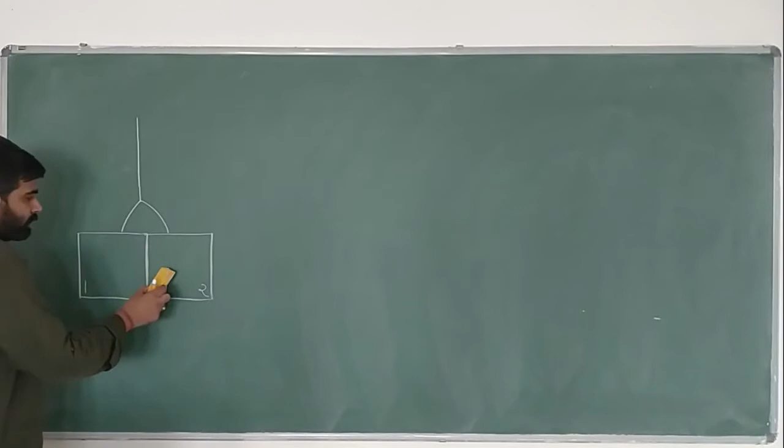Now in arc welding, the arc is going to act as a heat source, a source of thermal energy. So this base metal or workpiece to which we want to weld is going to absorb heat from the arc, and once the temperature crosses the melting point temperature, they will melt and form a weld pool like this.

Now, as we are using a consumable electrode, the electrode is also going to melt, and the droplet of molten metal from the electrode will also become part of the weld pool. Here you will see the droplets of molten metal coming from the electrode, and later on they will also become part of the weld pool. It is also called the molten metal pool.

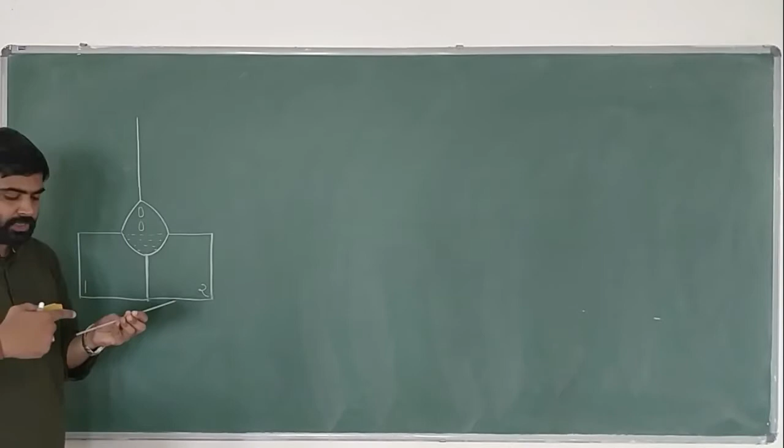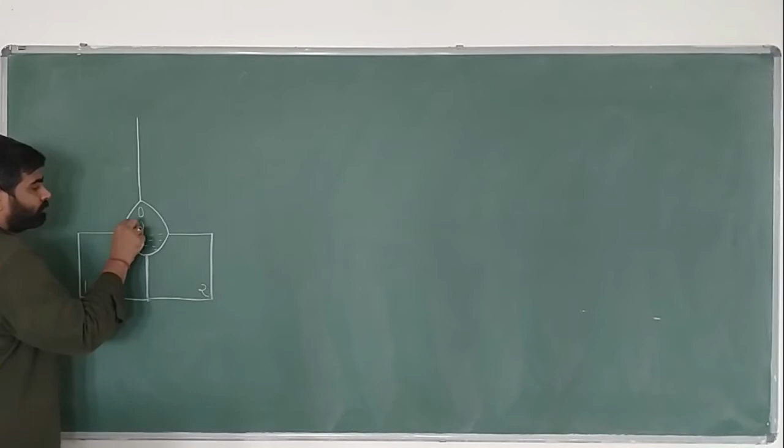Now when the electrode gets consumed, along with that, the flux coating is also going to disintegrate. When the flux coating disintegrates, it does two things. It is going to form a layer of slag over the weld pool, and second, it is going to produce a shielding gas atmosphere or shielding gas layer

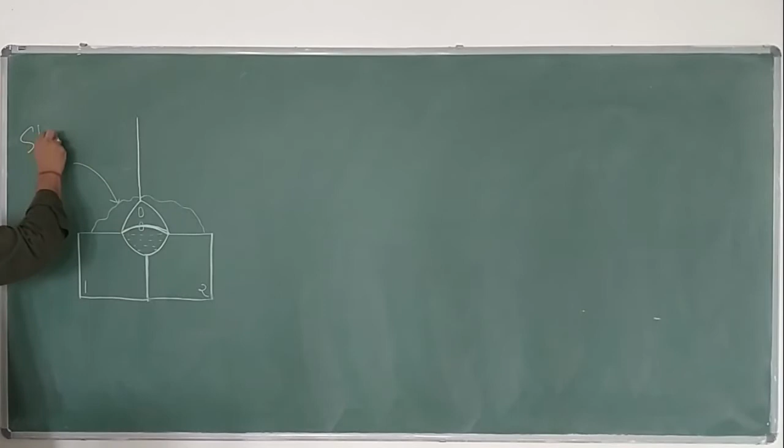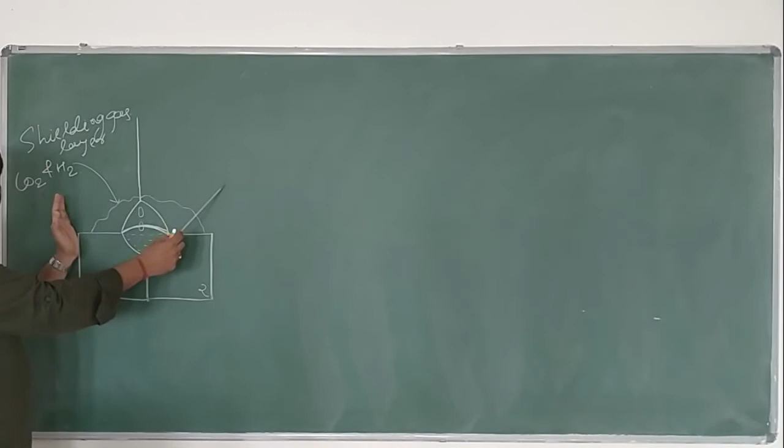of gases like CO2 and hydrogen. Now this layer of slag as well as the shielding gas layer of CO2 and hydrogen will not allow the weld pool to react with the atmosphere. It will not allow the atmosphere to contaminate the weld pool. It is going to protect and shield the weld pool from atmospheric contamination, and that's why this process is called shielded metal arc welding.

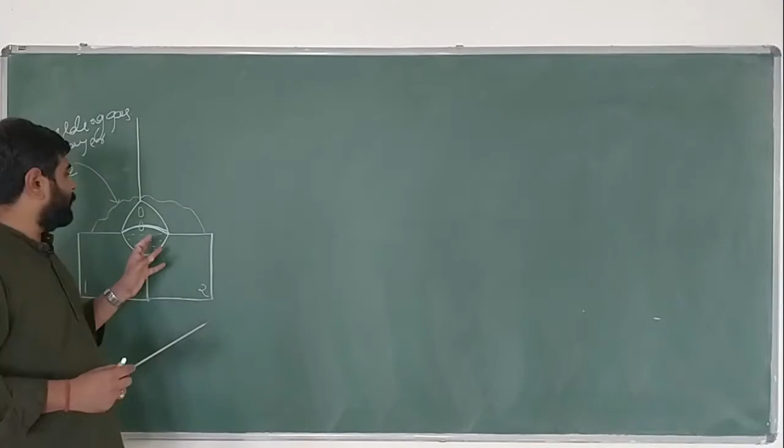One of the requirements that every welding process has to satisfy is to protect the weld pool from atmospheric contamination, because the reactivity of liquid metal is much higher than the reactivity of solid metal. If the liquid metal reacts with oxygen, it is going to form oxides, and the liquid metal also has a tendency to dissolve gases.

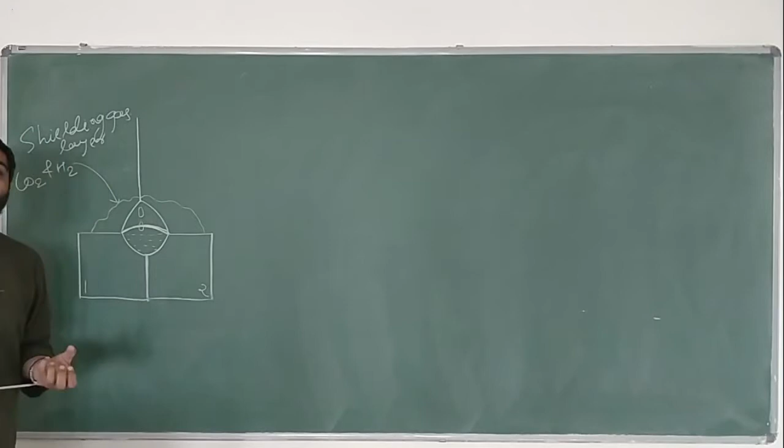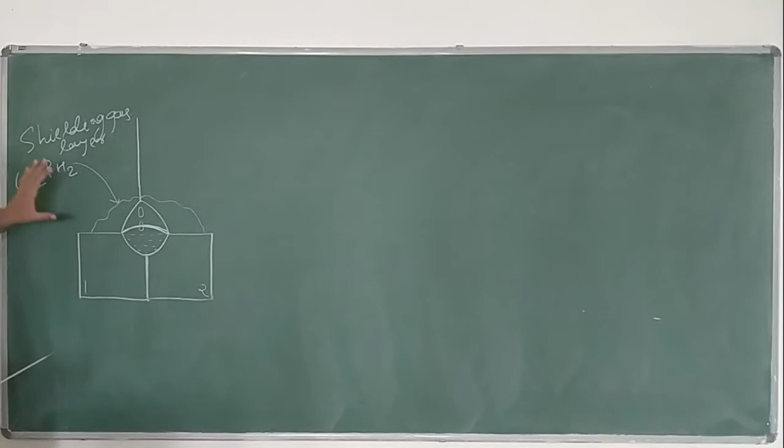If the dissolved gases and oxides stay in a weld, we will not have a sound quality weld. We always look for a weld which has good quality and good strength. So by the formation of slag and the shielding gas atmosphere, we are able to protect the weld pool from atmospheric contamination.

Once the solidification of the weld pool happens, we remove the slag by a hammering operation. Once the slag is removed, we are able to see the weld metal. So this is the operational principle of shielded metal arc welding.

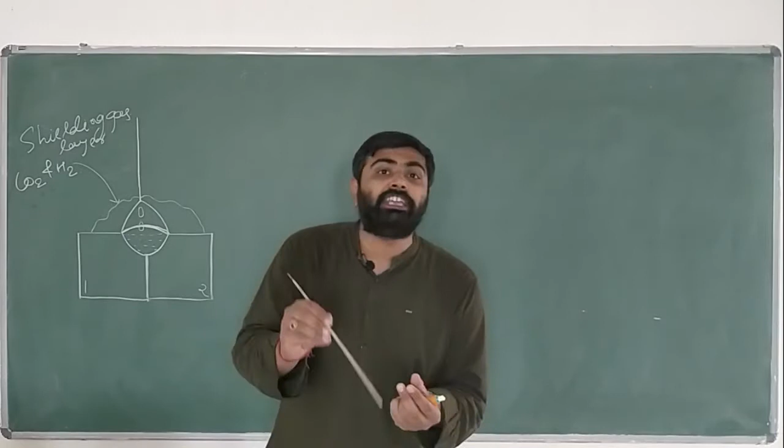Most of the time SMAW is used in a manual mode, and that's why this process also has a name, manual metal arc welding or MMAW. When you perform SMAW, you will experience that the electrode sticks to the workpiece, and that's why this process is also called stick welding. So SMAW, MMAW, or stick welding are different names given to the same process.

Now let us talk about the capabilities of the process. We will discuss the capabilities of SMAW in terms of what metals it can weld, the thickness up to which it can weld the base metal, and the positions in which this process is capable of performing a welding operation.

So let us talk about the metals. Almost all the commercial metals used in day-to-day life can be welded by SMAW. If we talk about steel - low carbon steel, medium carbon steel, high carbon steel, low alloy steel, high alloy steel, tempered steel, tool steel, die steel, hardened steel, including stainless steel - all can be welded by SMAW.

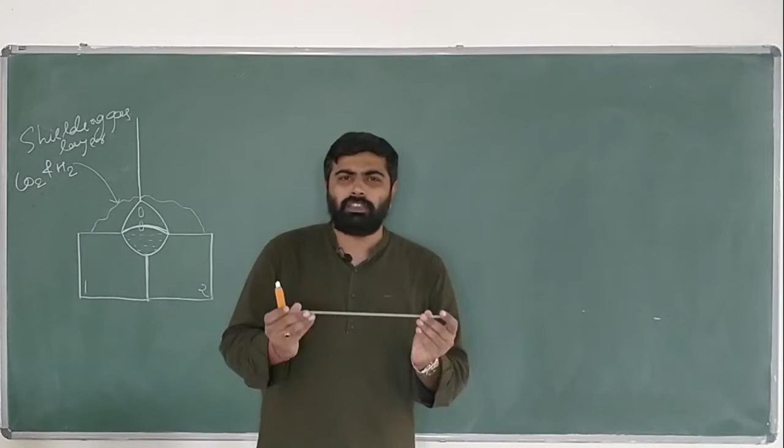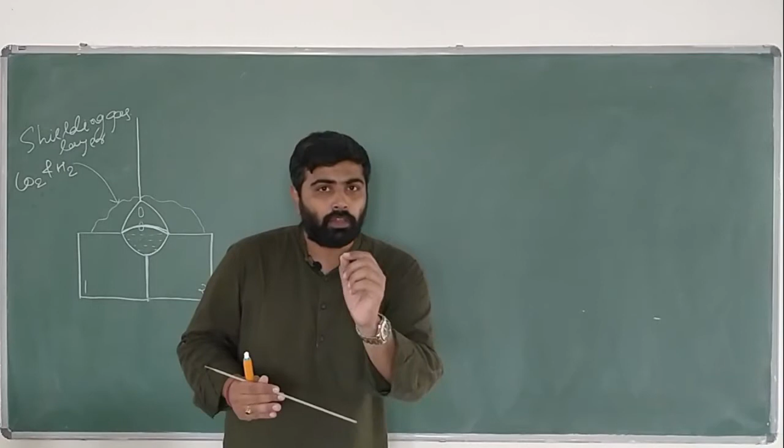All cast irons can be welded by SMAW. Nickel and nickel alloys like Inconel and Monel can be welded by this process. Copper and aluminum can also be welded by the process, but welding them with SMAW is not popular; different arc welding processes are used instead. However, one alloy of copper, bronze, can be welded by SMAW. So this is the capability of the process as far as welding different metals and alloys is concerned.

Just to add to that, none of the precious metals can be welded by the SMAW process.

Now, if we talk about the capability of the process in terms of thickness, this process can weld a thickness up to 3.2 mm without joint preparation. When we perform welding, sometimes we do it with joint preparation, sometimes without. Especially when the thickness is small, we usually don't prepare the joint.

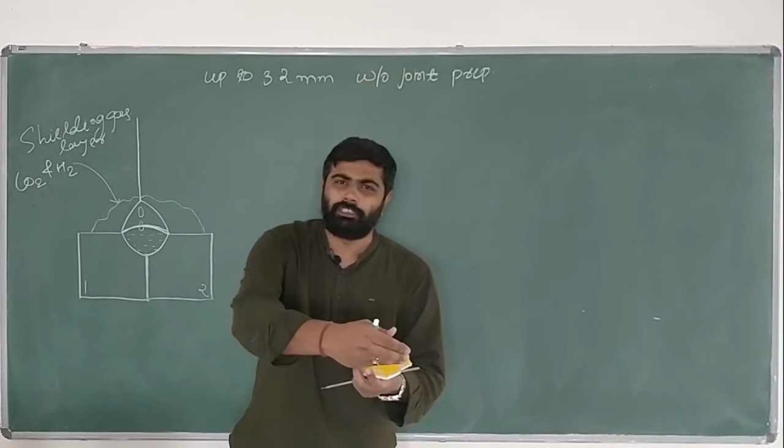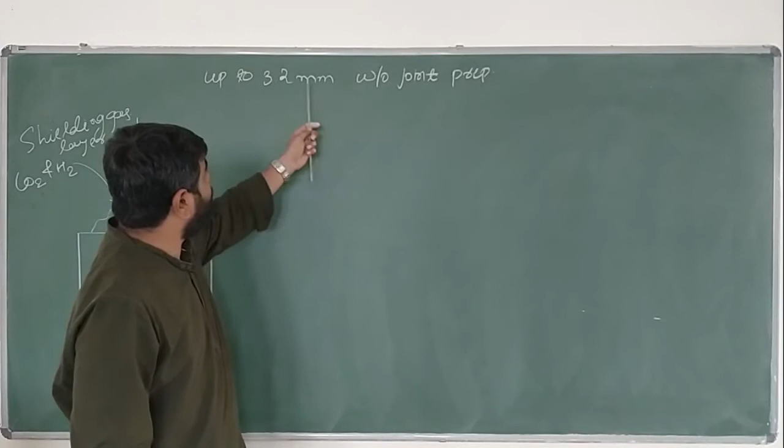Performing welding without joint preparation means, let's say these are the two components I want to weld - I'll just keep them side by side, remove any oxide layer or dust and dirt present on it, and then straight away perform the welding. This is called welding without joint preparation. So this process is capable of welding up to 3.2 mm thickness without joint preparation in a single pass.

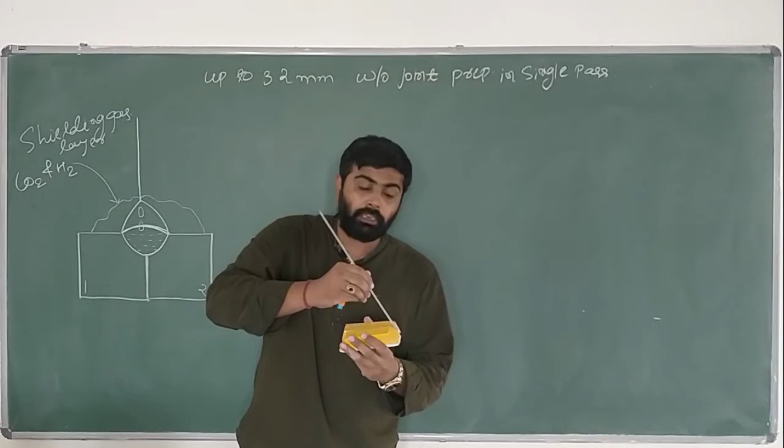Now, what is the meaning of single pass welding? A single pass welding means we complete the welding in a single run. So let's say this is a start point and this is an end point - if we complete the welding only in a single run of the electrode from the beginning till the end, then we call it a single pass welding.

If we prepare a joint - let's say we create a V groove or a square groove between two components - and then perform the weld, we call that performing welding with joint preparation.

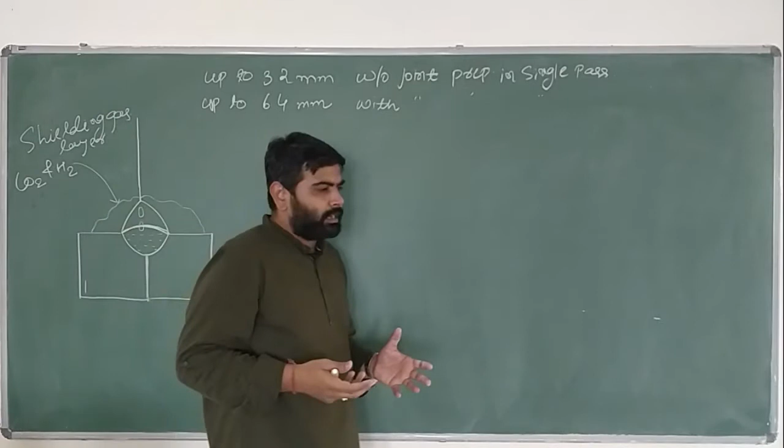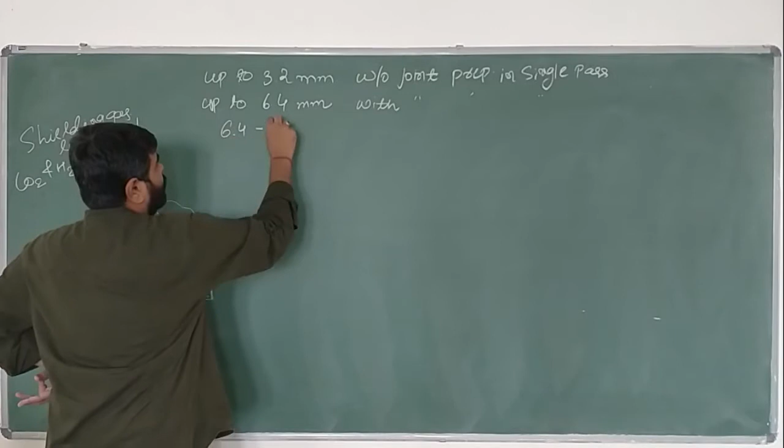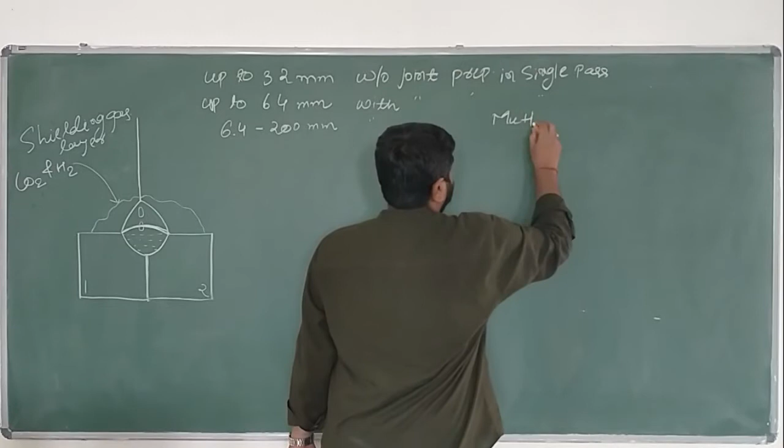In that case, the process is capable of welding up to 6.4 mm of thickness, but that is with joint preparation in a single pass. Sometimes when the thickness of a material is high, it is not possible to finish welding in a single pass, and then we have to do multi-pass welding. When we do multi-pass welding, the capacity as far as thickness is concerned increases, and the process can weld anything between 6.4 mm to 200 mm, definitely with joint preparation. Whenever multi-pass welding is performed, it is always performed with joint preparation.

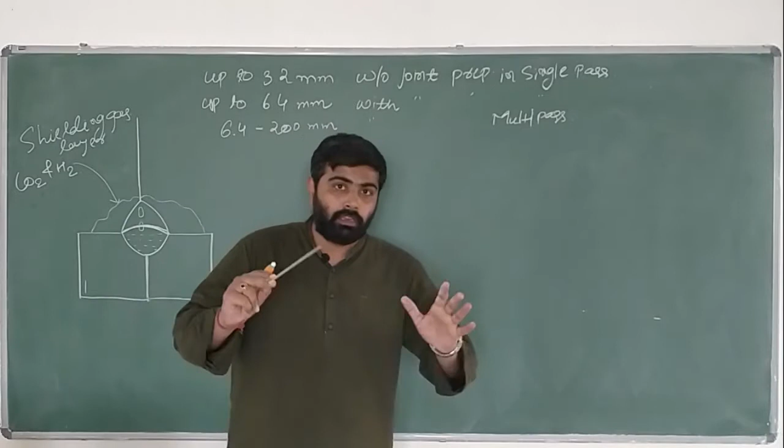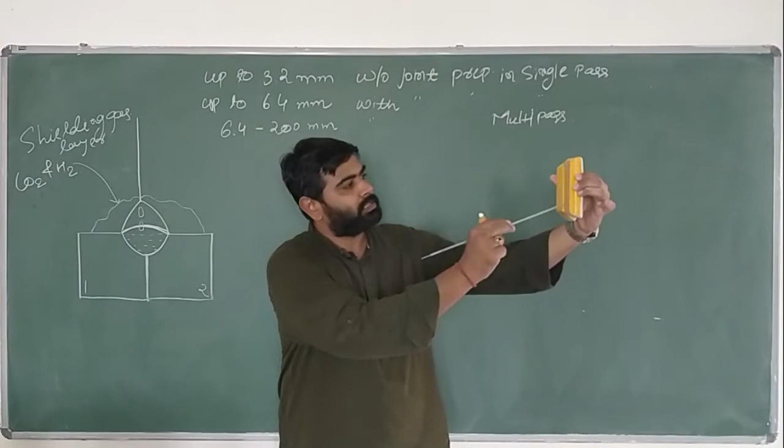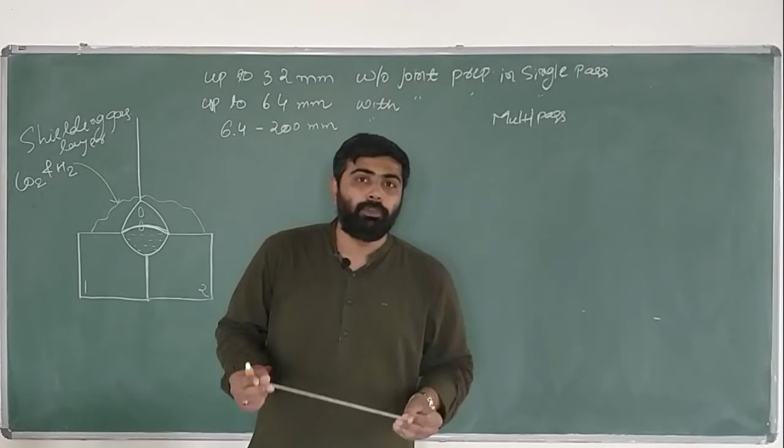Now let's talk about the capability of a process as far as which position it can perform welding in. There are four positions in which we perform welding. If two components are kept like this and we do the welding, it is called a flat position. If kept like this, it is called a horizontal position. If kept like this, it is called a vertical position. If kept like this, it is called an overhead position. So these are the four positions: flat, horizontal, vertical, and overhead. This process, SMAW, is capable of performing welding in all positions.

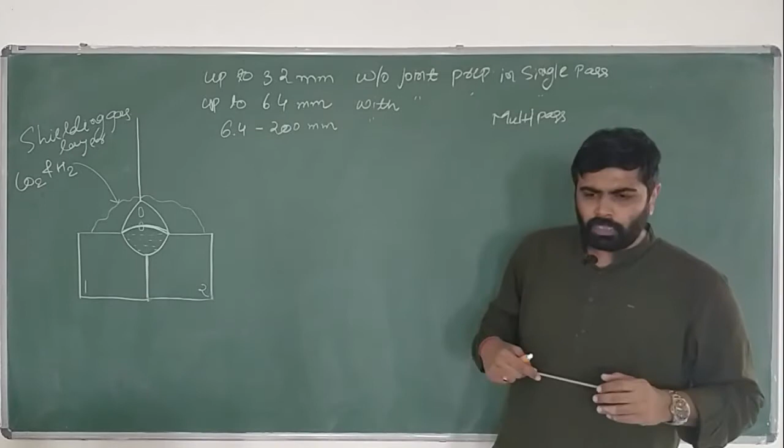Now when we are performing an arc welding operation, there are two types of current available to us. One is alternating current, AC, and the second is direct current, DC.

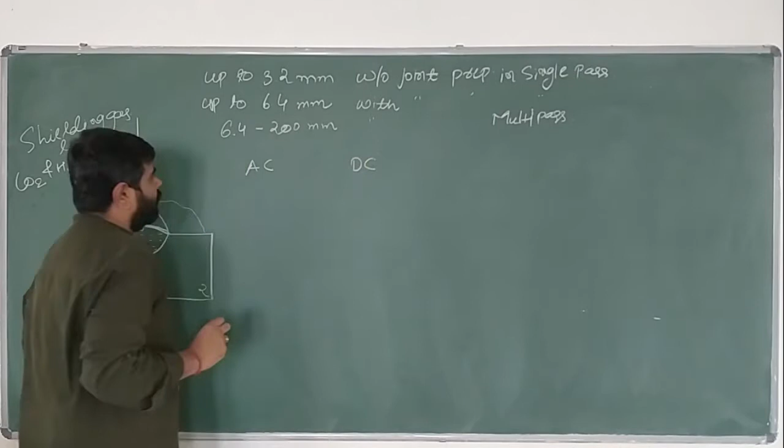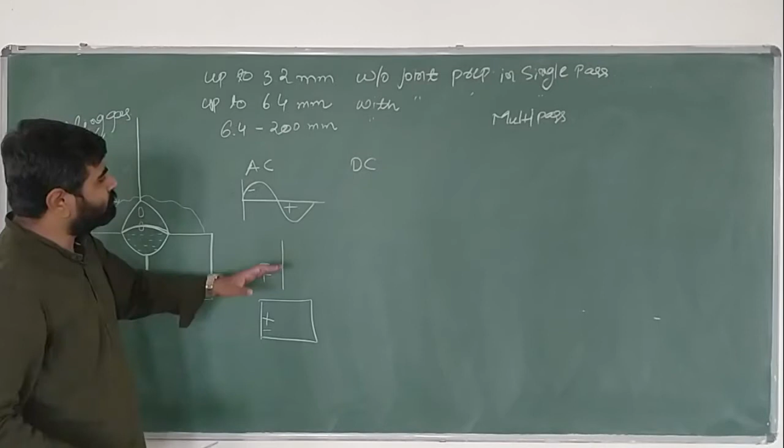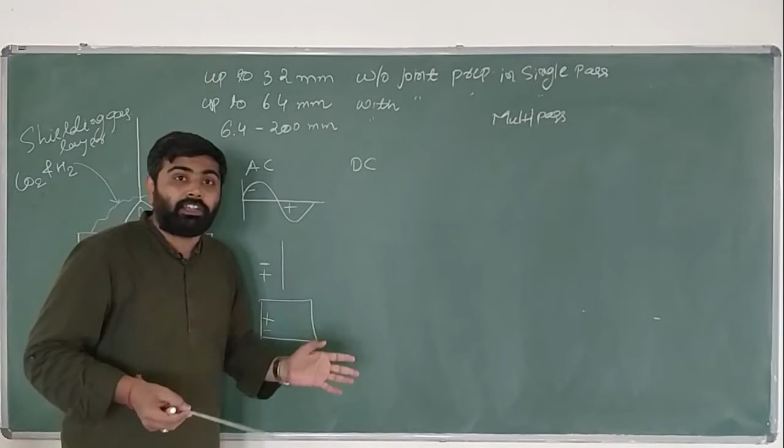In AC, the polarity of an electrode and workpiece continuously changes. As we know, AC has a sinusoidal waveform. So let's say this is an electrode and this is a workpiece. In one cycle there are two half cycles. For the first half cycle, let's say the electrode was negative, so the workpiece will be positive. For the remaining half cycle, the electrode will become positive and the workpiece will become negative. In India we have a frequency of 50 hertz, which means 50 cycles in a second, and the polarity changes every half cycle. So the polarity of the electrode and workpiece changes 100 times.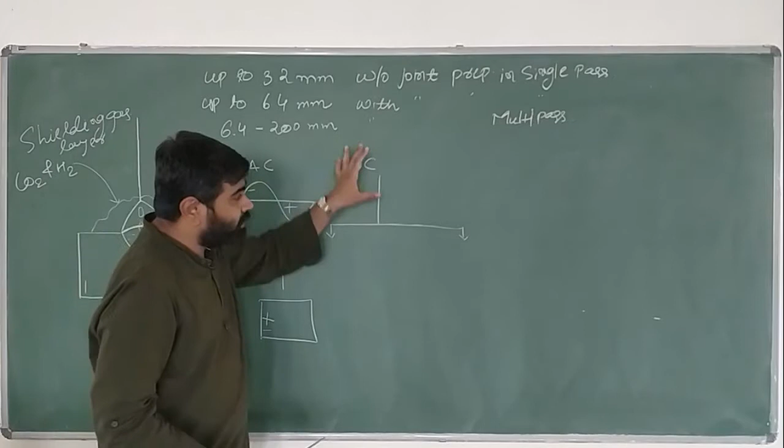Now when we use DC, which means direct current, there are two possibilities of polarity available to us. As we know, in direct current the polarity does not change. In the beginning, if we set something at negative polarity or cathode, it remains cathode throughout the process. Similarly, if we keep something anode, it remains anode throughout the process. So when we use DC, there are two possibilities of polarity available to us.

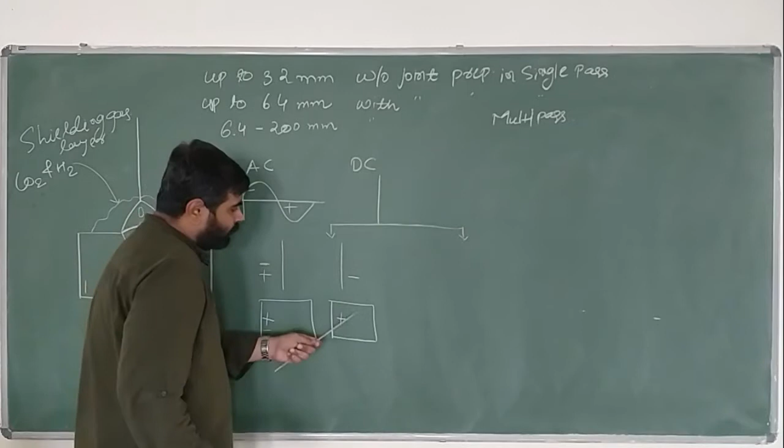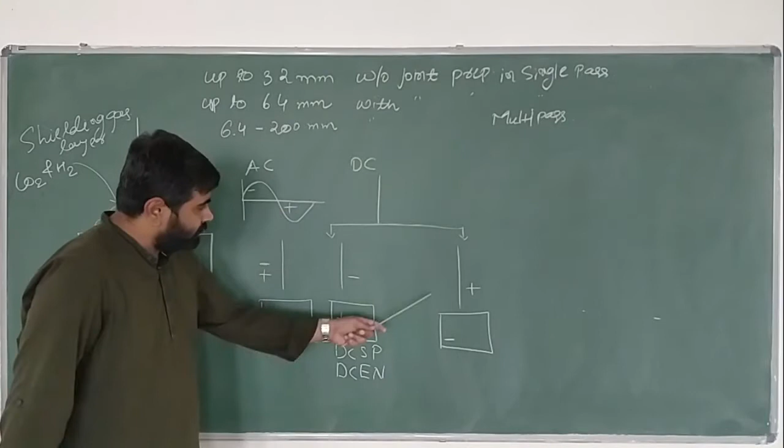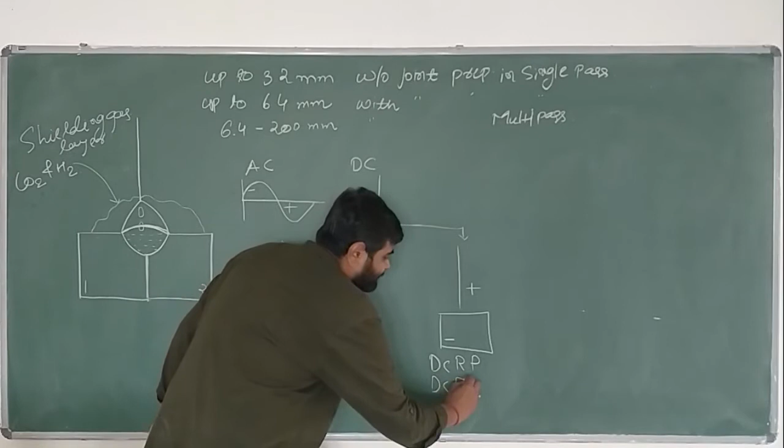Let's say we have an electrode and workpiece, and here we keep the electrode negative and workpiece positive. This polarity is called DCSP, direct current straight polarity. Here the electrode is negative, so it is also called direct current electrode negative, or DCEN. The other possibility is that we keep the electrode positive and workpiece negative. If we do so, this polarity is called DCRP, direct current reverse polarity. Because here the electrode is positive, it is also called DCEP, or direct current electrode positive. So there are three types of polarity available to us: AC, DCSP, and DCRP.

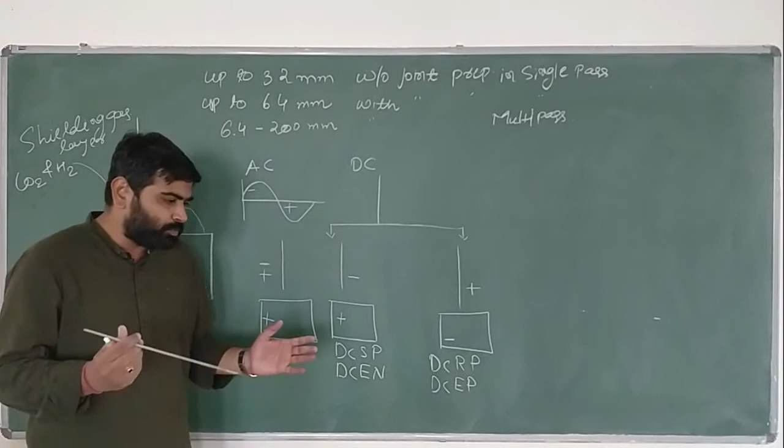Now the question is, which polarity should we use when we perform SMAW? There are many aspects on the basis of which we can select the polarity, but one aspect which majorly affects the selection of polarity is the penetration. Now let us first understand what penetration is.

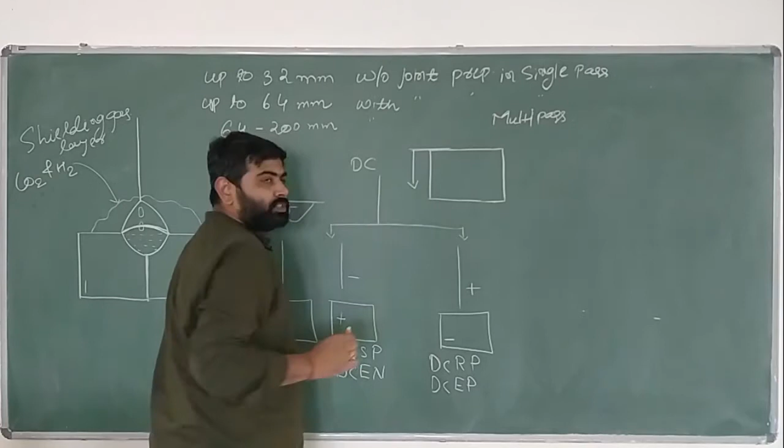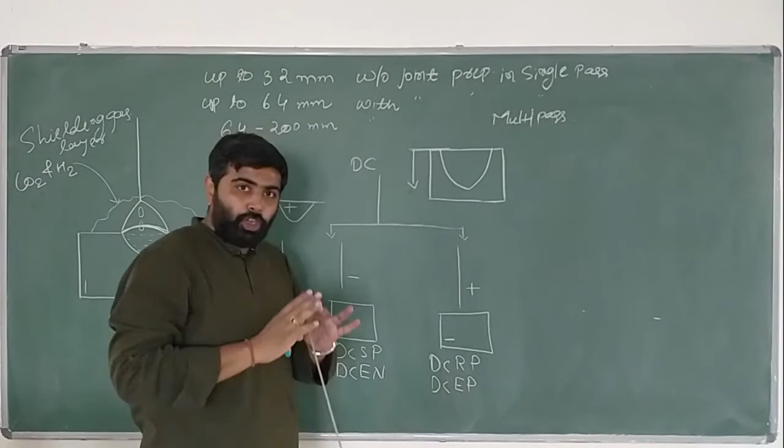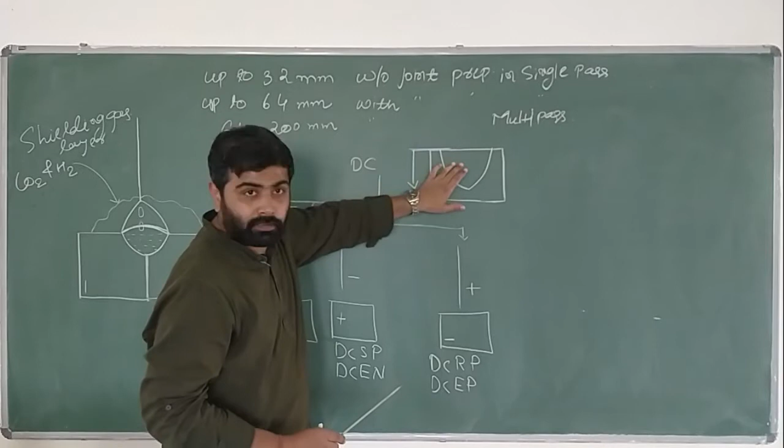Let us assume this is a workpiece. From the top surface of a workpiece to the depth up to which we are able to melt the base metal during the welding process, that is called penetration. From the top surface of a workpiece to the depth up to which we are able to melt the base metal during the welding process is called penetration.

So this is the depth up to which we are able to melt the workpiece, and this is going to be the penetration as far as this case is concerned. Now penetration has a direct relationship with the strength of the weld. Higher the penetration, higher is going to be the strength.

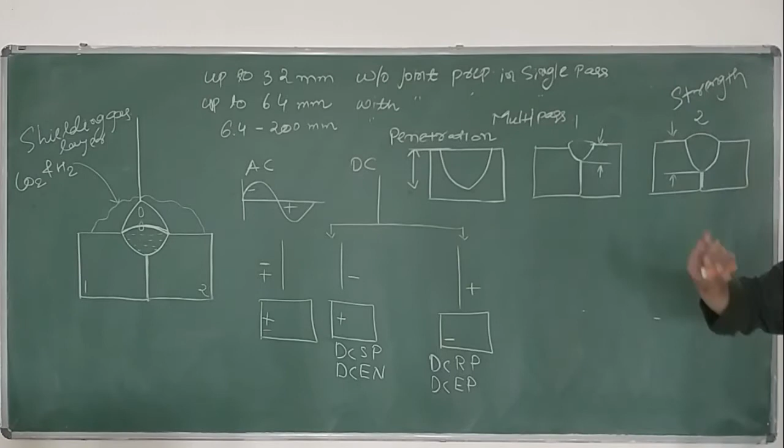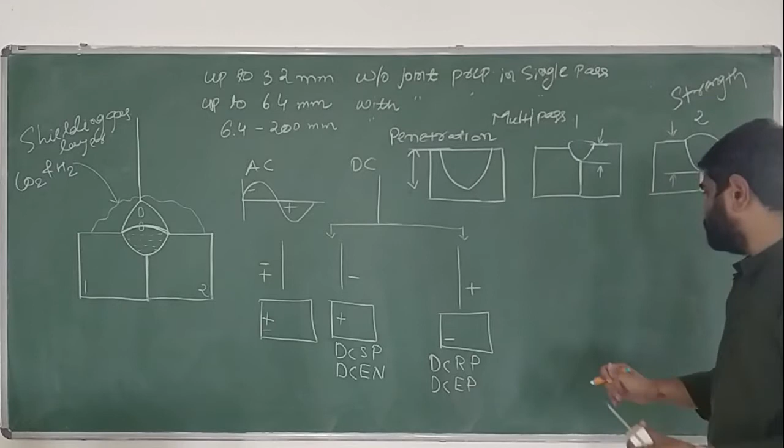So on the basis of penetration, if we have to make a selection of polarity, how should we make it? Let me show you a figure that explains the selection of polarity. Let us assume this is one workpiece and we are performing welding. Let's say here we use DCRP, here we use DCSP, and here we are using AC. So in a single workpiece we are performing welding with three different polarities.

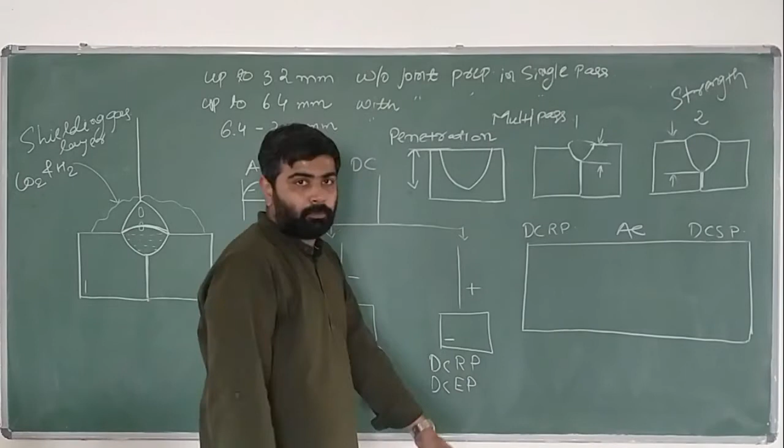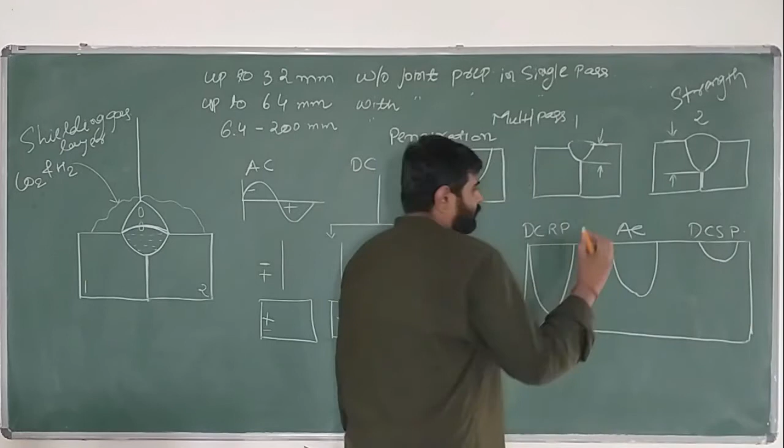If I show the comparison of penetration that we get, you see that in DCRP we get, let's say, this much amount of penetration, in DCSP we get this much, and in AC we get a moderate amount of penetration. So while using DCRP we get the highest penetration, in DCSP we get the minimum, and in AC we get a moderate amount of penetration.

So if penetration and strength is the concern, which must be a major concern in the welding process, then our selection will be DCRP, meaning the electrode is positive and workpiece negative. Here the electrode is negative, workpiece is positive, and here with AC, at every half cycle the workpiece and electrode change their polarity.

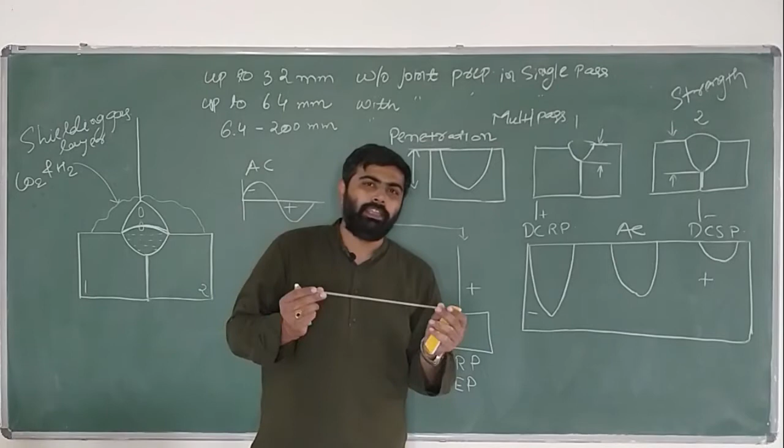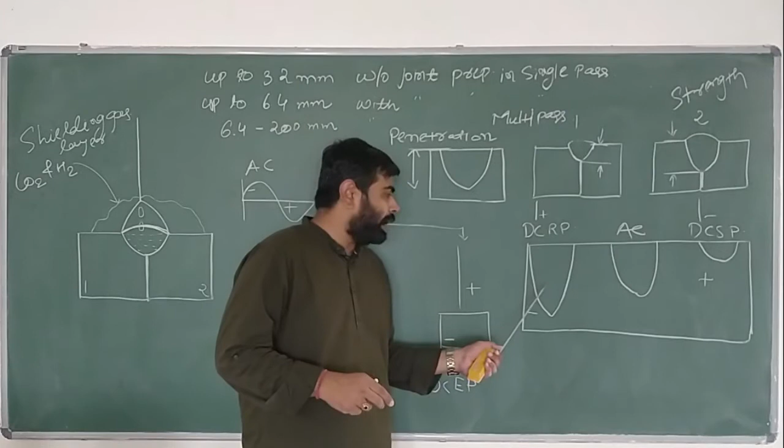So in most consumable arc welding processes, like shielded metal arc welding, metal inert gas welding, submerged arc welding, and flux core arc welding, you will see that most of the time welding is performed with DCRP. When DC is used, it's performed with DCRP, keeping the electrode positive and workpiece negative, because it results in the highest penetration, which results in high strength.

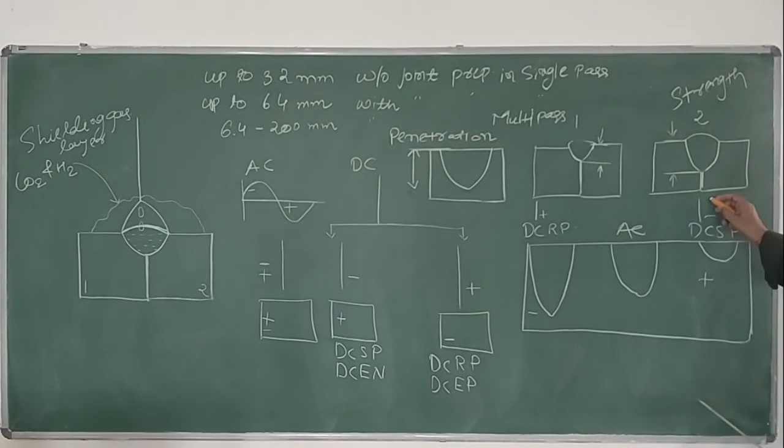With DCSP, we get a high melt-off rate. High melt-off rate means the rate at which the electrode melts is high when DCSP is used. Now let's talk about what type of power source is used in SMAW.

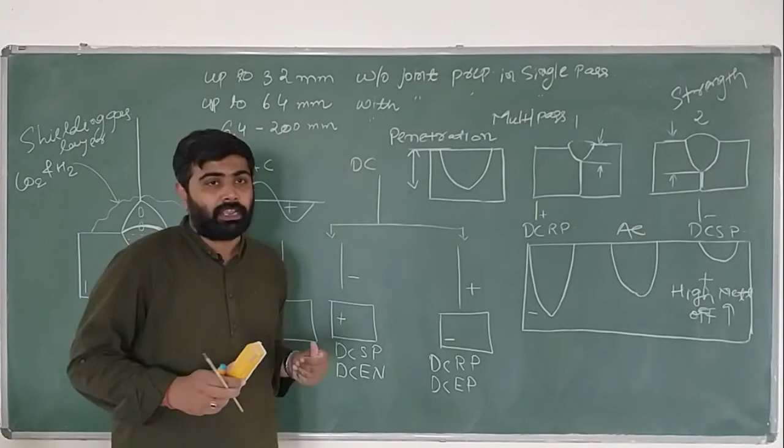Let me just rub a few things out. So there are three types of power sources available in arc welding. The first one is called CC, which means constant current power source. Second is constant voltage, CV, power source, and then we have a combined characteristic power source.

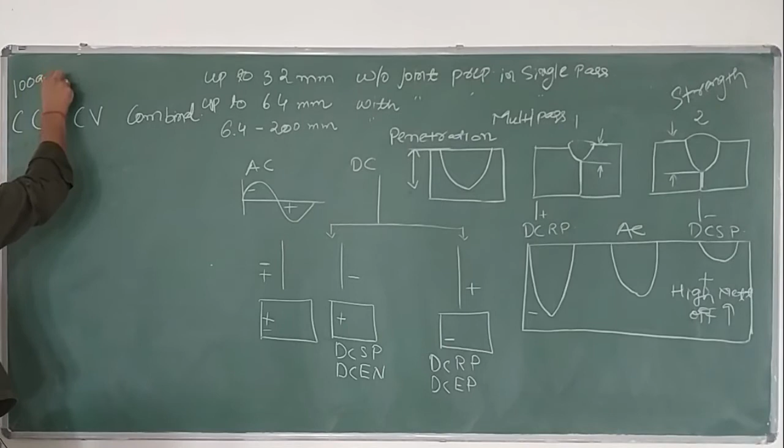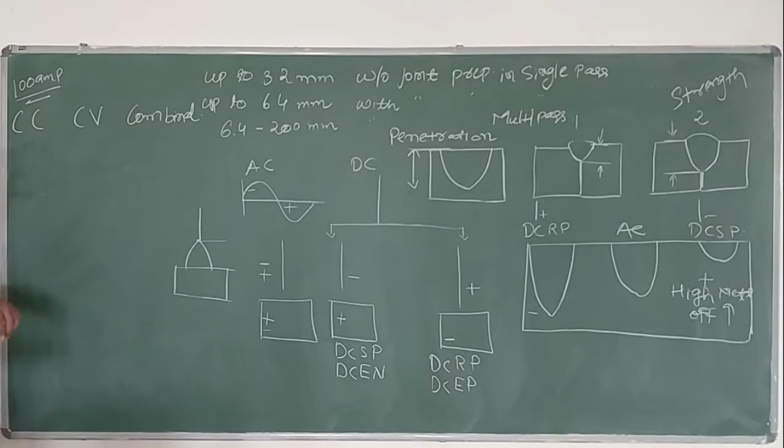A constant current power source means we need to set a current, let's say 100 amperes. Then throughout the welding process, it will supply us 100 amperes of current, irrespective of the arc length we have. Arc length means the distance between the electrode and workpiece. So here it supplies a constant current, while the voltage is going to vary. Constant current, variable voltage.

Constant voltage means the current will vary, but the voltage remains constant. A combined characteristic power source has the capacity to act as a constant current as well as a constant voltage power source. The power source shown later in this video is a combined characteristic power source, capable of acting as both constant current and constant voltage.

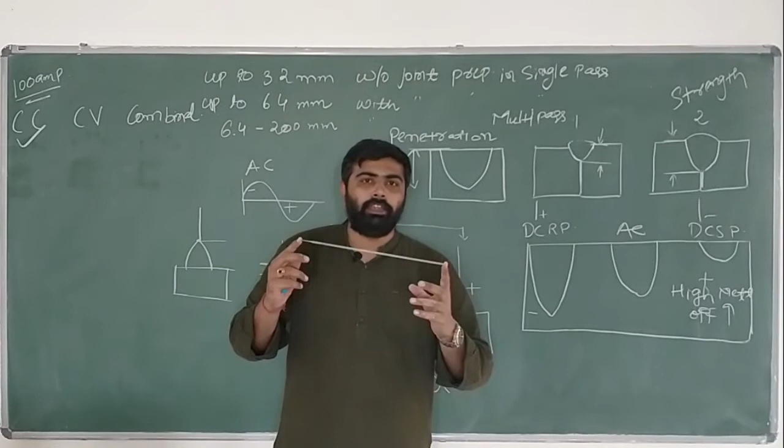As far as the SMAW process is concerned, SMAW requires a constant current type of power source. There are two major arc welding processes whose basic nature is manual mode: shielded metal arc welding and tungsten inert gas welding. Because their basic nature is manual mode, they need a constant current power source.

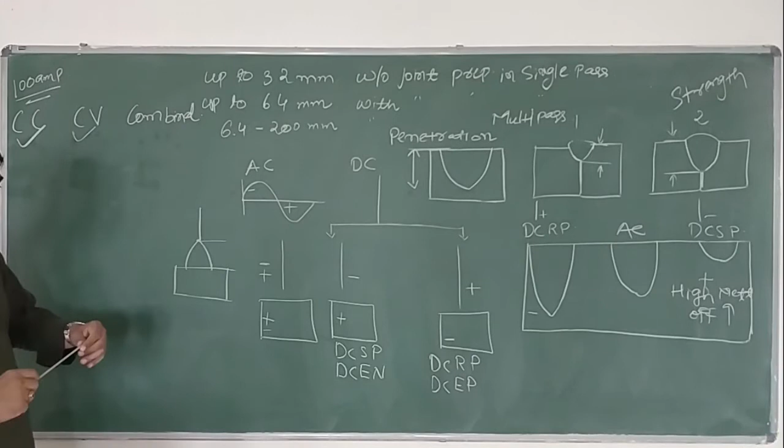If we talk about metal inert gas welding, which is semi-automatic in nature, again FCAW is semi-automatic, and SAW, which is automatic in nature, they will have a constant voltage power source. The power source we are going to see has the capability to perform TIG, MIG, as well as SMAW, so it has to be a combined characteristic power source.

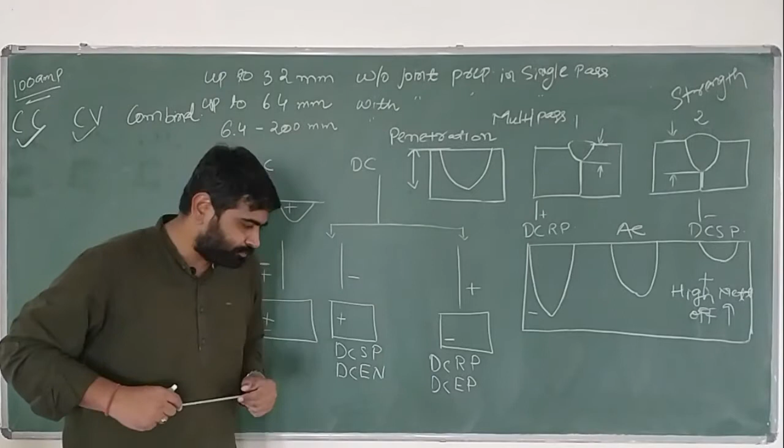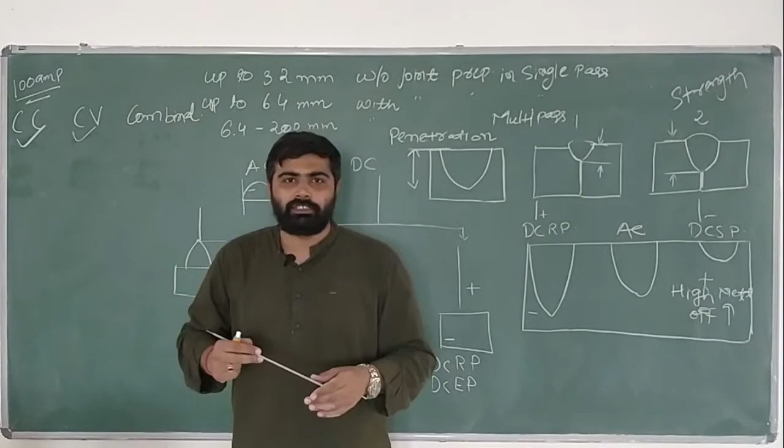Now let us talk about the application of SMAW. SMAW is mainly used nowadays in construction and maintenance industry. It is also used in small production houses where they do not want to spend huge capital on welding processes, where welding is not a major application. They want to create some tacks, or perform welding that does not require the highest quality or very high strength. In that case, shielded metal arc welding is a very easy option available to production houses or small fabrication shops.

As far as the advantages of this process are concerned, there is flexibility. We are able to use this process in all four positions. This process can weld almost all commercially available metals and alloys. This flexibility is the biggest advantage of SMAW.

Along with that, there is low capital investment the process requires. The power source required to perform this welding is not very costly. As we know, SAW requires a huge space to perform welding, because it has a rail along with the power source, so it requires a larger amount of space.

TIG and MIG will require separate cylinders, while the shielded metal arc welding power source will only need a power source, and those power sources are available in the market at a cost. If you compare the cost, it is much lesser than the cost of other power sources.

Nowadays, low current capacity power sources for SMAW are available in a range of even 10 to 20,000 rupees.

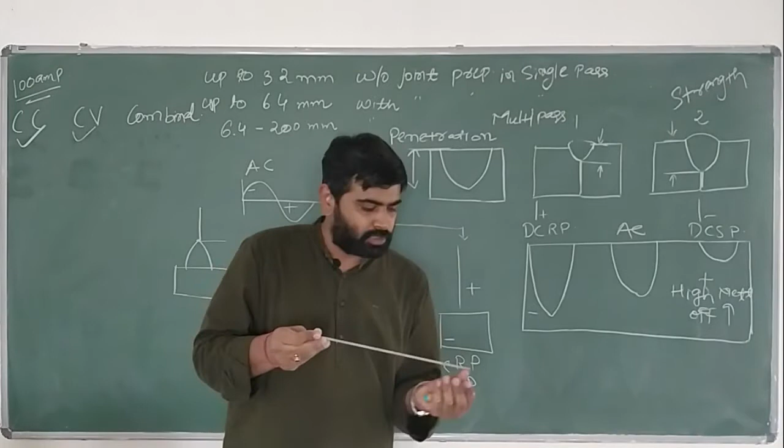If we talk about limitations of this process, there are two major limitations. One is a built-in break, which means that while performing welding with this electrode, we will not be able to weld continuously. Once the electrode gets over, because this is a consumable electrode that gets consumed during the process, we have to stop, change the electrode, get a new one, remove the slag, and then start welding again. Every time the electrode gets over, we have to get a new electrode, and that brings a built-in break into the process.

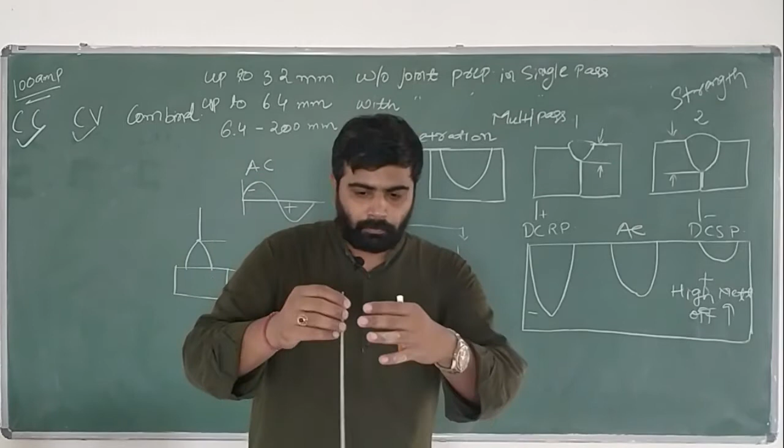The next limitation is that, as you will see with the electrode later in this video, the complete electrode is not covered with flux. There is some length which is not covered, and that length is called the stub length. A stub length is kept in the electrode so that we can hold it in an electrode holder.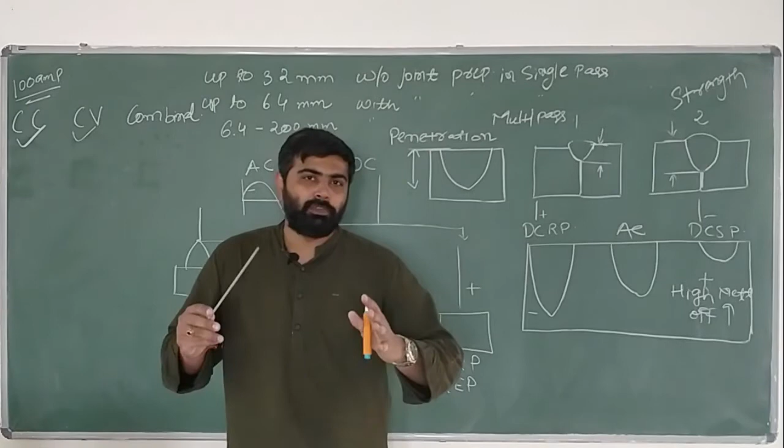So stub length is never used in a welding process, and so the electrode utilization is not 100%. So these are the two major disadvantages that the shielded metal arc welding has, and the important one is that it cannot perform welding continuously. So this is some of the theory portion which is related to the shielded metal arc welding process.

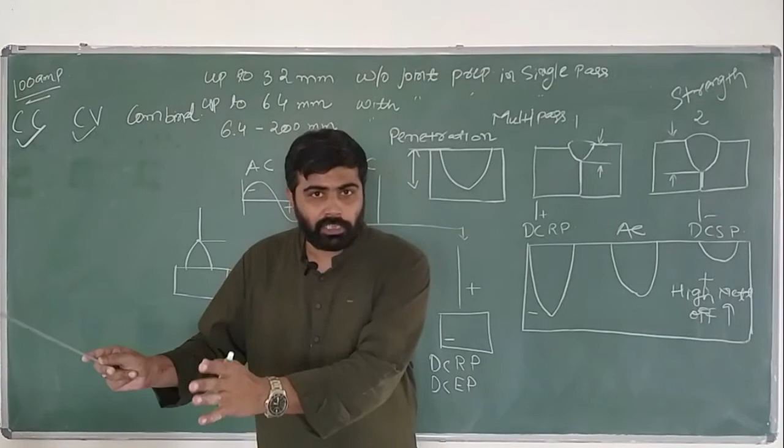Now let us look at the practical aspects of it. Let us understand the power source, and then the process, the shielded metal arc welding will be demonstrated to you. So let us go to workshop for that.

So this power source is going to supply the electricity for the welding process. The name of this power source is Champ Multi 400. This power source has a capacity to supply a maximum of 400 amperes. And the Champ Multi, because this power source is capable of performing three welding processes, as we can see here.

As we switch on the power source, there are three programs which are given to us. MMA, which means SMAW, MIG means metal inert gas welding, and TIG means tungsten inert gas welding. If we change the program, in order to perform different processes, we just need to change the program to MMA to MIG to TIG.

Right now, because we are going to perform a SMAW, we have kept the program as MMA. Here, with the help of these two knobs, we will be able to change its current. Usually the current used in a SMAW process is 25 amperes to 500 amperes, and the voltage which is used in the process is 15 volt to 35 volt. So here, with the help of this knob, we will be able to change the voltage as well as the current. Understand what is open circuit voltage.

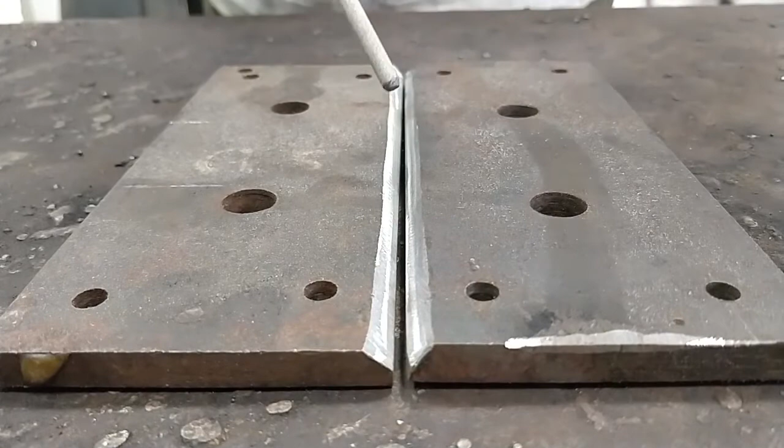So open circuit voltage is a voltage which is available when the circuit is open, which means that whenever we are not performing welding, so right now as you see we are not performing a welding process, so whatever voltage is available between the workpiece and the electrode is called the open circuit voltage. And as we earlier saw, this power source has an open circuit voltage of 75 volt for an MMAW process.

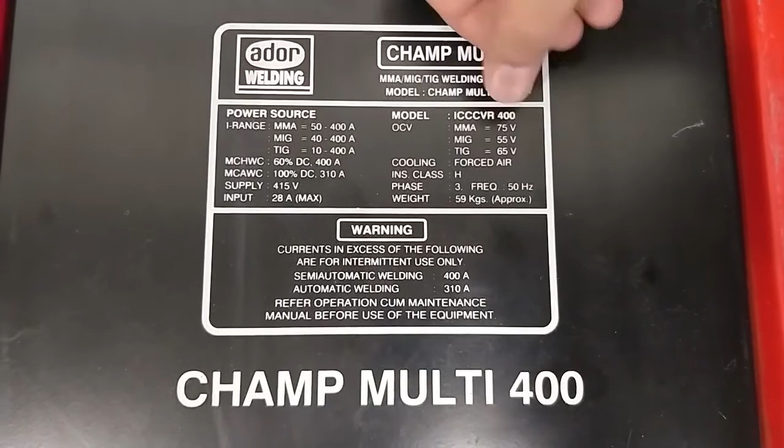Some other specifications about this power source are given on the top of the power source, as we can see here. The open circuit voltage for the MMA process, which is SMAW, is 75 volt. The maximum open circuit voltage which is available to us is 75 voltage. This power source will supply the current in a range of 50 amperes to 400 amperes for the MMA.

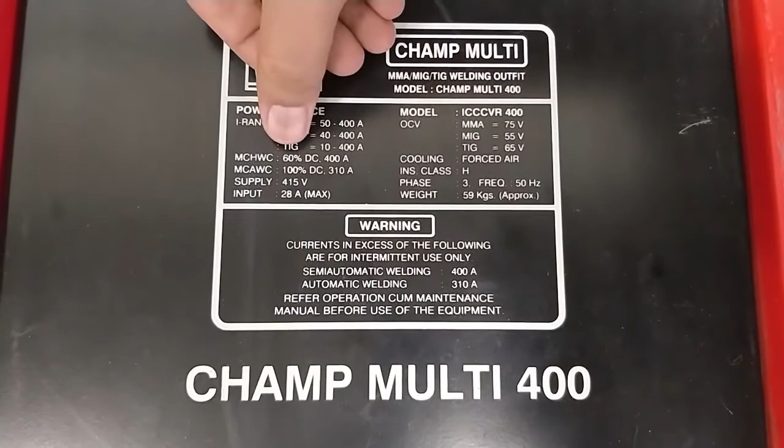And the duty cycle is 60% at 400 amperes, which means that we will be able to draw the 400 amperes, which is the maximum current. If we consider the welding of 10 minutes, we will be able to draw 400 ampere of current for 6 minutes, while for the remaining 4 minutes we have to give a rest to the machine.

And if we want to have, let's say, 100% duty cycle, which means if we want to perform continuous welding, in that case the maximum current we will be able to draw is 310 amperes, as it is mentioned on the top of the power source.

As we know that in SMAW we can use alternating current as well as direct current. This power source is going to supply us direct current, and when we do the welding with direct current, there are two possibilities of polarity available to us. One is DC-SP, which is direct current straight polarity, as well as direct current reverse polarity, DC-RP.

DC-SP is also called direct current electrode negative, because in that the electrode is kept negative and the workpiece is positive, while DC-RP is also called DC-EP, direct current electrode positive, because the electrode is kept positive and the workpiece is kept negative in that polarity.

Most of the consumable arc welding processes use DC-RP as the preferred polarity. And as we know that SMAW is also a consumable arc welding process, it also uses DC-RP. In DC-RP, the electrode is kept positive and the workpiece is kept negative.

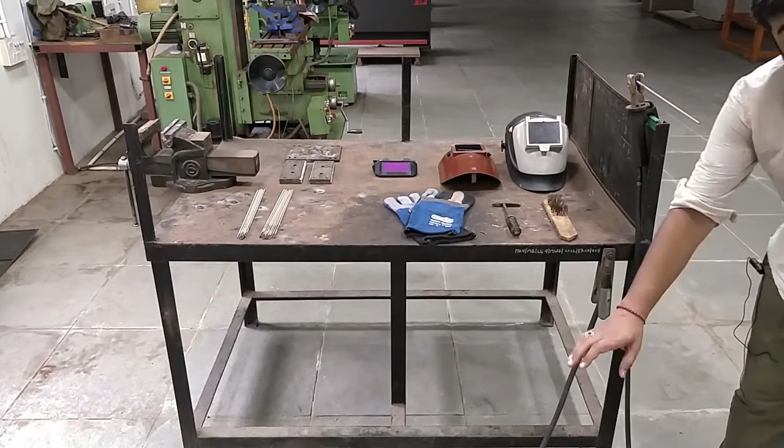So the wire which comes out of the positive polarity from the power source is given to the electrode holder, and the wire which comes out of the negative polarity from the power source is given to the work table. Now, whatever is going to be the polarity of the work table, that is going to be the polarity of the workpiece. If one wants to perform welding with DC-SP, in that case, the wires need to be interchanged at the power source.

Let us talk about the electrode which is used in a shielded metal arc welding process. As we know, this is a consumable flux coated electrode, a metal rod on which the flux is coated. The portion on which the flux coating is not there, which is used to hold the electrode in an electrode holder, is called the stub length.

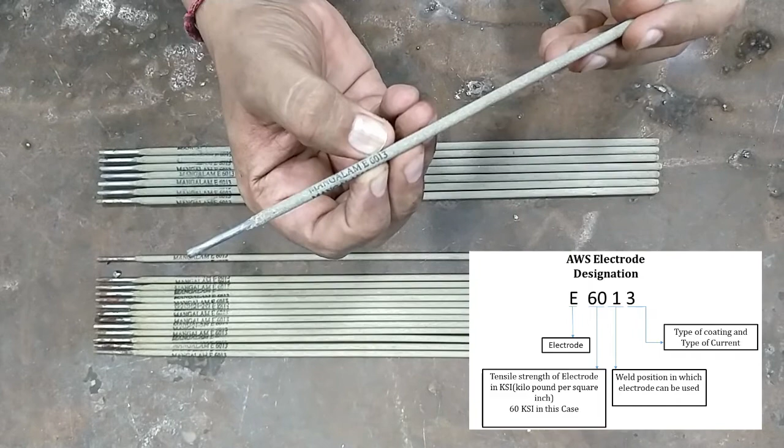The third number indicates the position in which the electrode can be used. We know welding is performed in 4 positions: flat, horizontal, vertical, and overhead. Here number 1 is written, which means this electrode can be used in all positions. If instead of 1, let's say 2 is written, it means that electrode will be used in a horizontal position and a flat position. And instead of 2, if a 4 is mentioned as the third number, it means the electrode can be used only in a vertical position with a downward progression.

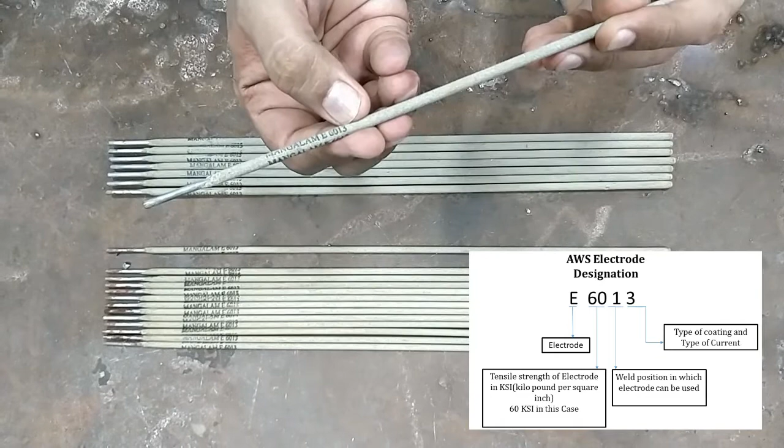As far as the fourth number is concerned, it indicates what type of coating is there, and the type of coating decides what type of current can be used with this electrode. Here the number 3 is written, and number 3 indicates rutile and potassium coating, which also means this electrode can be used with AC as well as DC, and in DC we will be able to use this electrode for DC SP and DC RP.

We are going to use the touch and draw method of arc initiation, which means in order to establish the arc, we are going to touch the workpiece with the electrode and then withdraw it. When we do this touch and draw, the atmosphere or gap between the electrode and workpiece will be ionized, and that ionized atmosphere is going to take the electrons from the electrode to the workpiece and the positive ions from the workpiece to the electrode.

As far as the thickness capability of shielded metal arc welding is concerned, without joint preparation it can weld up to 3.2 mm in a single pass. With joint preparation, thickness up to 6.4 mm can be welded in a single pass. A single pass means we strike the arc, start the welding, and end at the other end, performing it in a single go. That is called a single pass.

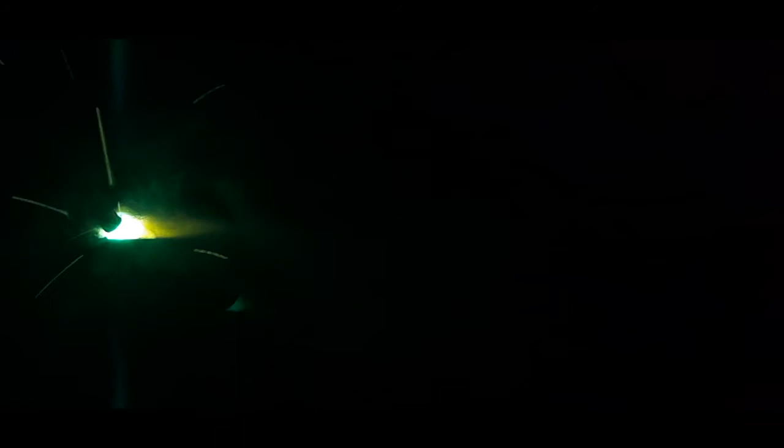The droplets of liquid metal which are coming out of the weld pool, as you can see in the video, are called spatter. Spatter is considered as one type of loss in welding.

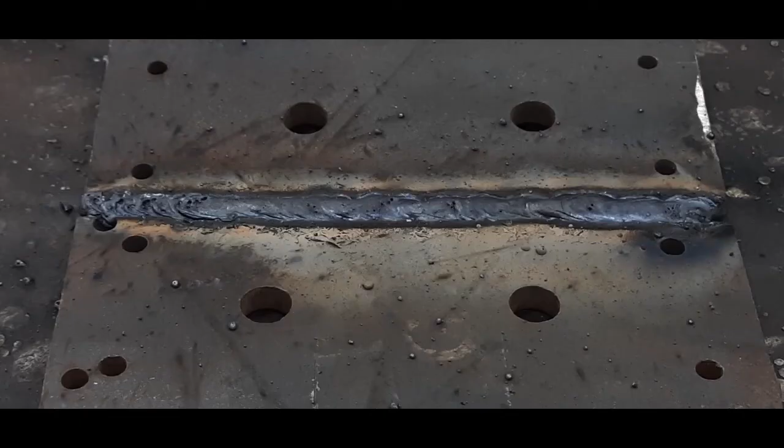During the welding process, as the flux disintegrates, a layer of slag is formed over the weld pool. The slag protects the weld pool from atmospheric contamination, and it also prevents or reduces the rate of heat transfer.

After every pass of welding, we have to remove the slag from the weld. If we don't remove it and perform another pass, a defect called slag inclusion may come into the welding, which is not good for a sound quality weld.